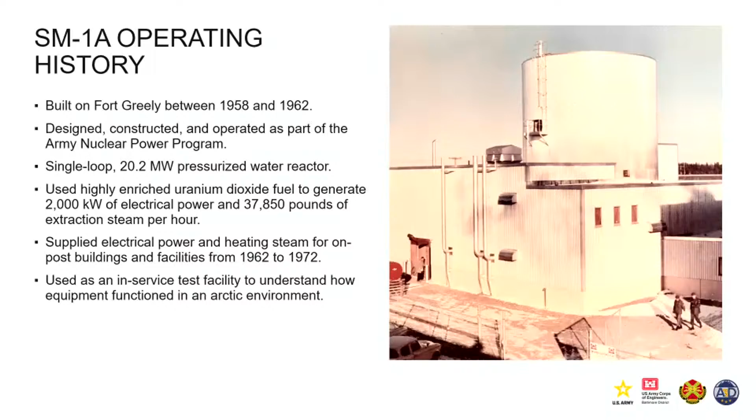So that was in operation from 62 to 72. It was primarily built as an in-service test facility to see how a reactor would operate in a remote location, and it is currently the only reactor that's ever been built in the state of Alaska.

In 1972, the reactor was shut down for the last time, and the Army went into what we call initial deactivation. We were going to place this facility into safe store. Part of that initial deactivation included removal of all the control rods, all the fuel, and all the liquid radioactive waste from the site.

After that was completed, at this particular site, the reactor components were encased to minimize dose to employees who continued to work in the central heating and power plant. So a combination of an AM9 grout and concrete cap were placed in the reactor container vessel, the spent fuel pit, as well as the hot waste tanks. So they're all encased, which again helps to further minimize any potential dose to anyone working in these areas. What are we looking at in this picture?

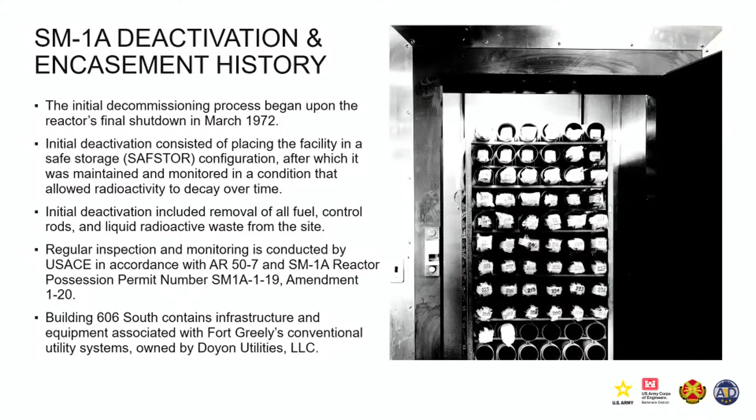As we discussed, Building 606 is the infrastructure and equipment for all of Doyon for the central heating and power plant, and so we've isolated those operations from our project.

So here are a couple quick photos. As I discussed, when we were in the planning phase, we quickly realized that there was no safe way for us to implement this project without relocating all of Doyon's infrastructure from the north end of the plant to the south end of the plant, which included not only some of their conventional utility equipment, but also their administrative offices and some of their supplies.

So we worked with the installation as well as with DLA and with Doyon, and we issued a modification to their privatized utility contract. Over a course of 18 months, Doyon moved from the north end of the plant to the south end of the plant. Now the south end of the plant is a standalone facility for Doyon, so there should be no impact or interruption to any of their services to the installation.

Our team did a final audit and inspection of that in May of 2023, and that was really what we considered to be the first phase of our decommissioning effort. So our side of the building, the north end, has been completely segregated from the south end, and we'll take additional steps to segregate those portions of the building as we move into our next phases.

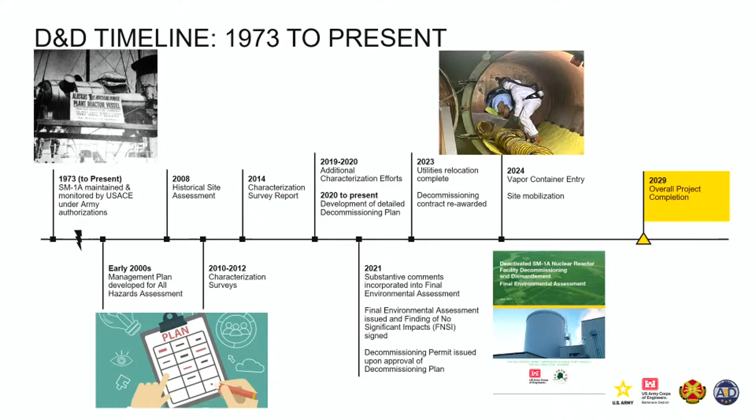And at this time, we anticipate we will be done in 2029.

Okay, so we'll move into our regulatory framework. We are self-regulated, authorized under the Defense Utilization Facilities, Section 91B of the Atomic Energy Act of 1954. So all of the wastes generated from this project are legacy Department of Energy waste. We operate under the Army Radiation Safety Program, which is AR 385-10. We have our own set of radiation protection plans and programs.

As we transition into the field later this summer, our contractor will implement their radiation protection plans for the project. All of our permits to both possess the site and implement the decommissioning are issued by the Army Nuclear and Countering Weapons of Mass Destruction Agency. We call them USANCA. So we have those permits, and that regulator does come and visit us on a very, very frequent basis.

They were here in January again. They also stand up and host the Army Reactor Council, which brings in additional subject matter experts from the Army to support any regulatory decisions that they need to make. And because we are self-regulated and we don't want to recreate the wheel, we do comply with DOT, the Department of Transportation, the Nuclear Regulatory Commission, and EPA.

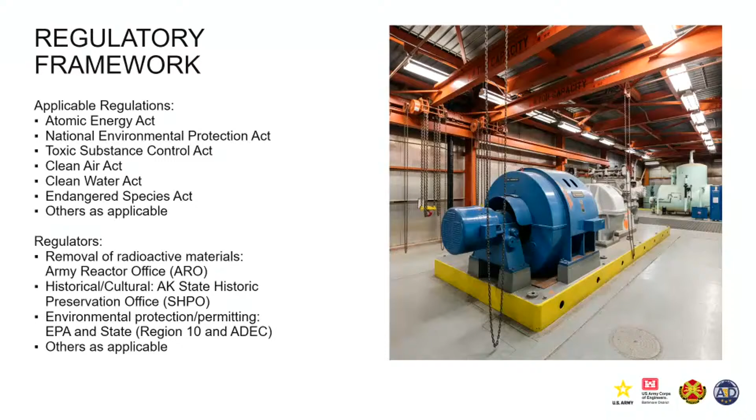We've been coordinating with EPA Region 10 with respect to our waste generation, and then Alaska Department of Environmental Conservation for any local needs that we have from a regulatory perspective.

Okay, so we'll move into our planning efforts to date. We've done extensive characterization of the site that began in 2011. The proposed action under our environmental assessment was to decommission and dismantle the SM-1A in its entirety, which will reduce and remove residual radioactivity, and will allow us to release the site for unrestricted use here at Fort Greely. The environmental assessment did find, again, no significant impacts from implementation of the project, and actually found that there will be long-term beneficial impacts because we're going to remove the radioactivity associated with the site.

As we discussed, we do have a memorandum of agreement with the State Historic Preservation Office, and our final formal decommissioning plan was completed in January of 2022. And I think the important thing to note, this is our third reactor as a team. I've had the same team on 2 other reactors to date, and we've successfully implemented the decommissioning of the MH-1A, which was a nuclear reactor on a floating barge. And we are successfully implementing right now the decommissioning of the SM-1 at Fort Belvoir in Virginia, which is the sister plant to this facility.

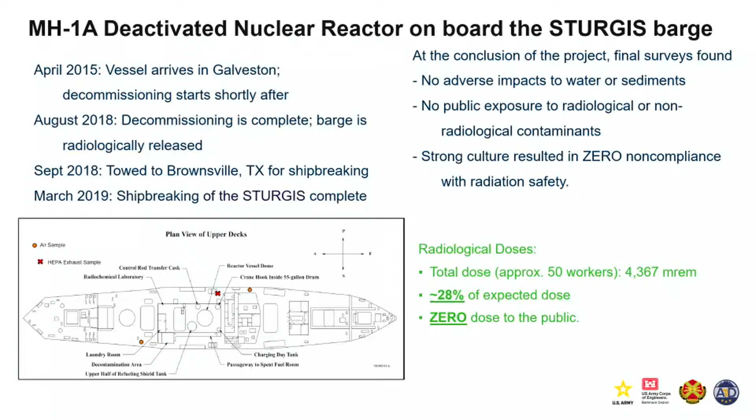The SM-1 deactivated nuclear power plant at Virginia is the sister plant to this facility. They're pretty much mirror images of each other. We have removed all the reactor components at this site. Just today, all of the above grade components at the site have been removed. So demo above grade is complete.

This particular site has extensive soil contamination, so the team's been diligently working on that, and that site's planned to be wrapped up in 2025. To date, we've worked on that project for over 3 years with no safety incidents at the site and no radiological concerns at the site.

Again, since we have removed the reactor components, the radioactive portion of this project is primarily done. Our overall expected dose to our workers was about 880 millirem, and to date, all of our crew has received only 309 millirem. So still, again, a significant reduction in what we anticipated.

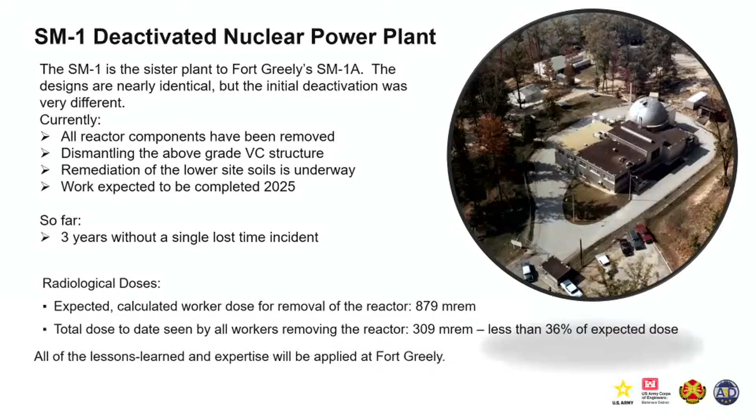What we're doing here is bringing all those lessons learned and all that expertise from both those prior projects to Fort Greely. So our approach to this project, and what the contractor has been tasked to do, is to prepare all the plans to implement the project at this point to ensure compliance with our decommissioning plan and our decommissioning permit. This includes project management, all the radiological and occupational safety, and significant engineering evaluations to go into this project.

We will remove all the reactor components and all contaminated soils. Everything will be properly packaged and transported to the lower 48 for disposal. We do a significant amount of in-process radiological surveys, as well as when we're prepared to leave the site, we will do what's called a final status survey, which is the final radiological survey to demonstrate to the regulator that we have achieved unrestricted release for the property.

All the buildings associated with the reactor will be completely demolished and removed, and the site will be restored for future use.

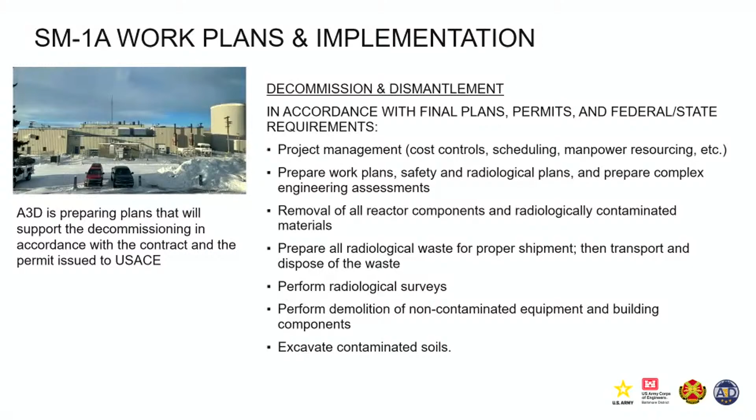One of the key components of the work, and one of the things that was important to our project team, was the ability to work year-round here in Alaska. So the contractor has come up with a very innovative way to allow us to work safely year-round and to provide a tempered environment for us to work in.

So we will be installing a very large weather enclosure. It'll be a large tent for the remainder of this year. We hope to mobilize in May and begin construction very soon thereafter.

And that tent will provide a cover over the entire north end of the site. Within that tent, we will do all of our waste packaging. We'll keep our equipment inside. We'll do all of our environmental and radiological monitoring, both interior and exterior to the tent. And that'll give us that buffer to keep our employees warm year-round to continue to work.

Additional containment will be built within the tent once we begin to actually start removing reactor components. And prior to doing that, we will definitely be coming back and hosting meetings so that you're aware of how that's going to be done and what to expect when you see things going on here at the site.

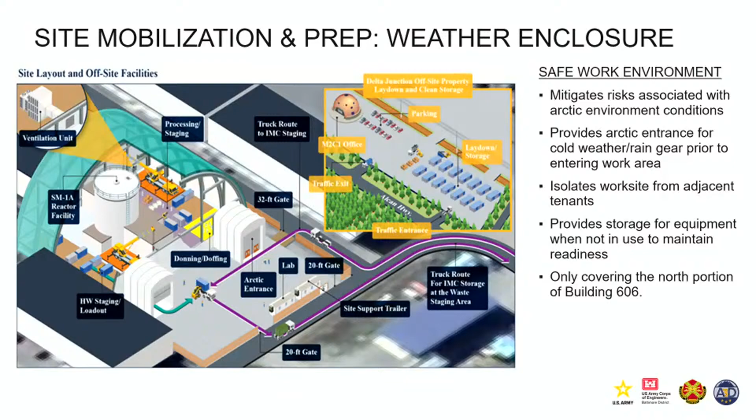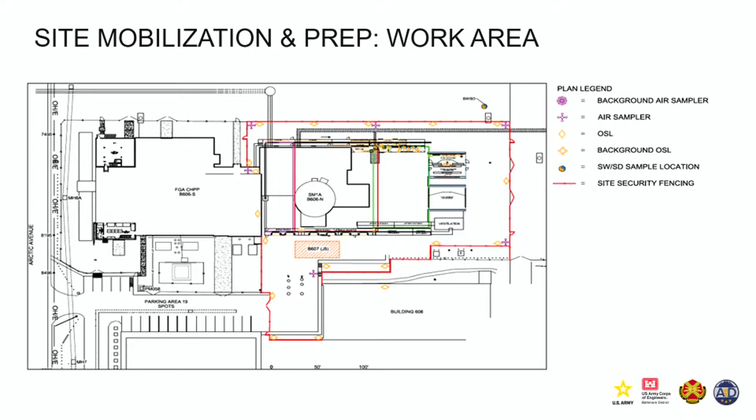There'll be manned access points into the facility for our team, and those areas will be strictly controlled from a security perspective. Other than our team, only fire and emergency services will have access to those if there were to be an incident during non-working hours.

So in addition to the primary site, since it's a very, very small site, we've worked very closely with the Department of Public Works to secure another location here on post to actually build another tent, which is where we'll store all of the waste once it's been packaged and is ready for transport. The primary reason we're doing this is we do have a very long multimodal transportation route to get this waste to the lower 48.

And so some of this will have to be moved in shipping campaigns. And since the site is very constrained, once the materials, the waste is packaged, we want to quickly move it off the site to make sure that we have maximum flexibility in our work area.

So there will be another tent built and constructed about a half a mile from the primary site. It will be fenced, secured, and monitored via camera. And then all of the waste will be stored in there, and then it will exit from that to be transported off post.

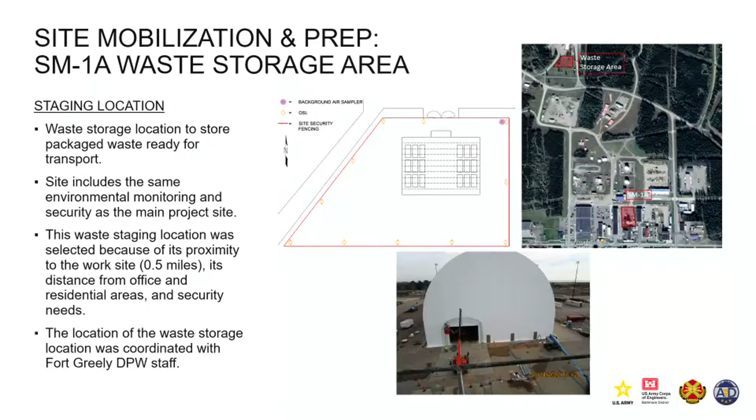And it will go out to, what is it, Big Robin Road? I think it's the next slide. Maybe? No. Okay, well, it will go out the primary main gate onto the Richardson Highway. And we'll be talking about that a little bit later on the slides.

Once the tent is constructed, we will be prepared as a team to demonstrate to our regulator that we're prepared to implement formal decommissioning, which actually starts with the asbestos abatement at this site. So because of the age of the building, we have asbestos, we have lead-based paint, we have PCBs, we have a lot of universal waste. And we did leave a few items from the utility separation that we need to deal with as well. So that will be our primary effort for the first 3 to 4 months.

And the reason we want to do all of the hazardous material abatement first is it minimizes exposure to our employees in the long run, and it minimizes impact to cutting through a wire or pulling a wall down and realizing that there's asbestos behind it. And that's one of our key lessons learned from other projects, because that has happened to us. So we will be doing that in early 2025.

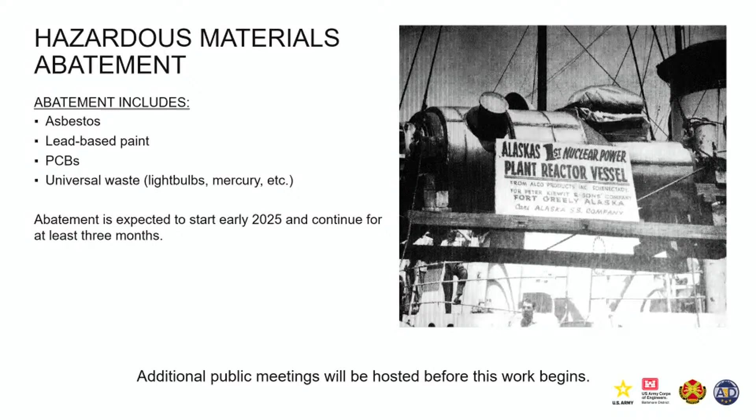And prior to that, we will host additional public meetings, again, to make sure that everyone's involved and aware of what the next steps will be.

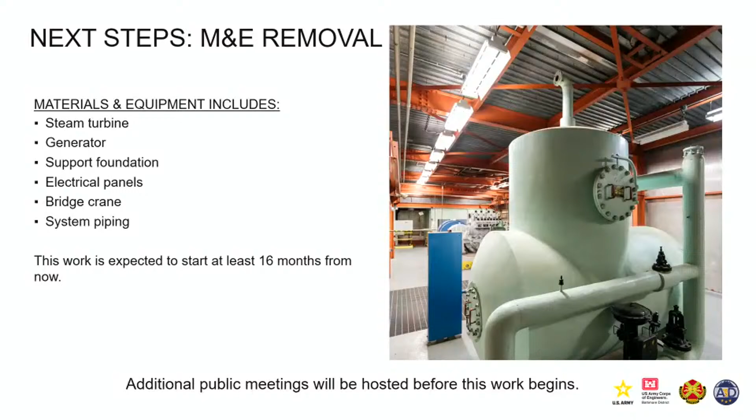So moving into waste transportation and radiological safety. Radiation safety, safety in general is the number one priority for the Corps of Engineers. So there will be minimal risk to the public, to any of the tenants, to the community on Fort Greely from this project. The reactor pressure vessel, as we said, contains no nuclear fuel.

So again, no nuclear fuel is left at this site. So really what we have left here is large chunks of activated metal that resulted from the operation of the facility. So our primary mission is to remove all that, safely package that, and get that moved to a disposal facility in the lower 48 states.

The primary reason that we went into SAFSTOR for such a long period of time was to ensure that the occupational safety of our work crews was maximized. So the primary driver from an occupational perspective is the cobalt-60 associated with the operation of the reactor. It has a very, very short half-life of 5 years and some change, and it has decayed away. So from an occupational perspective, that makes our dose during implementation significantly less and gives us greater ability to control that dose to our crew as we implement the project.

As I've stated, this team has done 2 other reactors, and this will be our 3rd. So we're bringing all of our skill sets to this project, and we are prepared to implement this project with safety at the forefront.

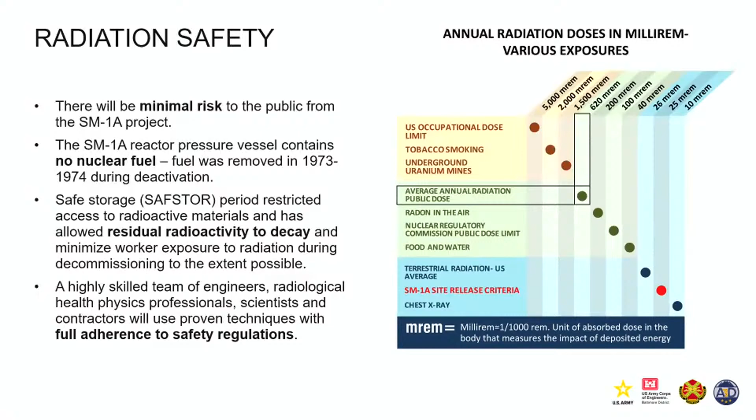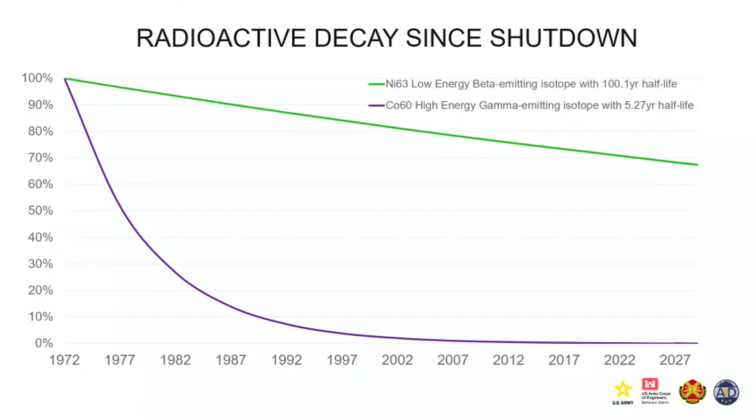The other component that is of concern for us is the nickel-63. It is primarily associated with the long-term disposal, and that's what the disposal facilities are designed and implemented to manage in perpetuity. It will not decay away. It's not going anywhere anytime soon. And so our efforts here are to remove that from the installation and remove this permanently from the site.

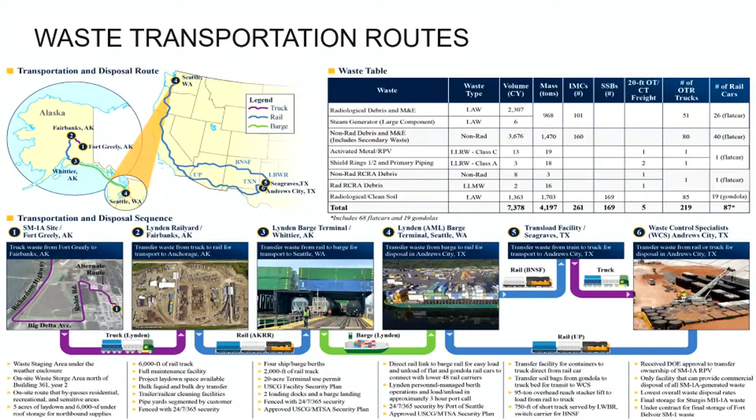We were originally anticipating using both soft-sided bags and what we call an intermodal container, which you can see in the middle photo there. At this point, we've transitioned to using strictly hard-sided or intermodal containers, just because of this long transportation route and maintaining the integrity of our packaging as we move through this round trip. We're estimating this to take about 90 days for a container to leave and come back to us. So it is a very detailed logistics plan that we're going to have to work through as we implement the project.

With that being said, all of our waste, both radiological and non-radiological, will be transported out of the state of Alaska for disposal. We have no intention of leaving anything other than maybe office waste here in the state of Alaska, and that's primarily due to the landfill regulations and the regulatory framework here in the state of Alaska.

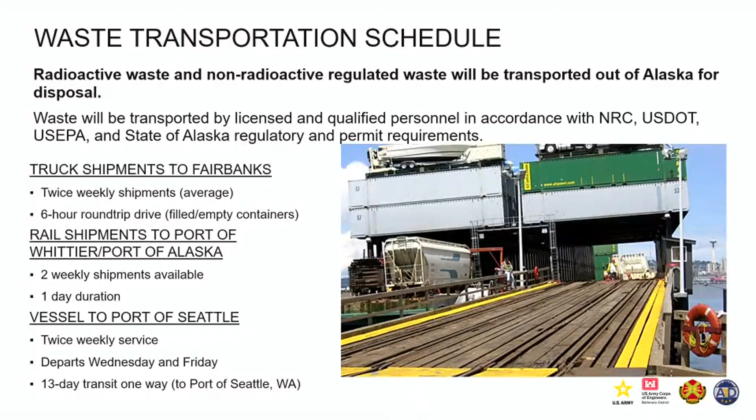We will be shipping by truck. We're anticipating 2 trucks weekly to leave here to go to Fairbanks, and then shipments out of the Port of Whittier, again right now our anticipation is 2 weekly shipments. And then as we move down into Seattle, depending on the service of the barge and when that timing is, we're hoping again to get twice weekly service. So we'll be monitoring this closely and making sure that all of our waste gets to the disposal facilities.

Another key component of the project is tribal consultation. As part of our environmental assessment, we did do an initial round of tribal consultation in June of 2020. And then in September of 2020, we actually hosted a tribal meeting where several tribes along the transportation route did come out and engaged with the project team. We started our second round of tribal engagement at this time, sent out another 103 letters just before we arrived in Alaska again this week. Now that we've defined our complete transportation route, we're beginning to receive feedback from some of the tribes along the transportation route with respect to the project.

So public involvement - as I indicated, we've got several stakeholders here for the project: our regulators, other government agencies, public interest groups, the property owner, the garrison, and obviously Doyon, the tribes as we've discussed, and then federal and state officials.

We are very committed to a very transparent communication approach with respect to this project. So we do have an active project website, and Fort Greely assists us in sharing our information here locally as well. And then I email a project update once a month to everyone on our stakeholder list, as well as post that on our project website. So if you want to sign up for that and you're not already on it, we can get you signed up.

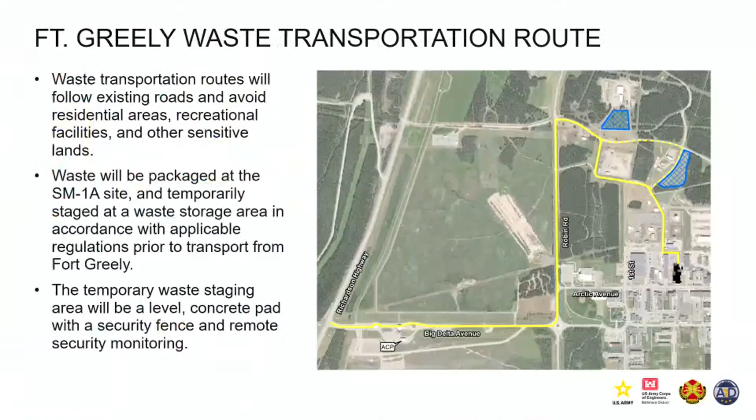Can you go to that slide? Can we do without them, or do we need to re-drill new wells? She's going to get to that. I think it was wells 11, 12, and 13. Keep going, keep going. There you go. Oh, okay.

So well 11 is interior. It was a water supply well. Well 12 and 13 did supply water at portions of the operation. Well 13 did turn into an injection well. So when the discharge to Jarvis Creek was ceased, we consolidated waste, and waste was injected into well 13. That is the reason we're going to completely remove and remediate it. It really doesn't have anything to do with the facility itself.

Fort Greely has done comprehensive groundwater monitoring, as well as our team. These wells don't impact anything from a groundwater perspective associated with the installation, and it won't have any impact on any water supply for the installation.

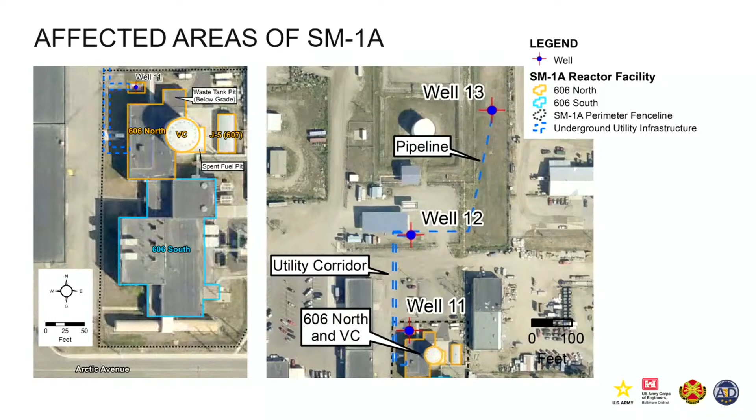I have a comment. I think that probably the biggest pushback you might see from Delta Junction would be the issue about transportation and the amount of traffic on the highway. And they're also expecting to do some improvements on the highway, is it this coming year? This summer, yeah. I think there's 18 places that are going to have passing lanes, something like that.

So you're going to have construction. You're going to have a lot more traffic there because of the gold mine, and then more trucks. I think you're going to have probably a little more reaction in the community about that.

Right, we understand, we're tracking the benefit of our current proposed schedule. We don't really anticipate starting to generate any waste until early 2025, which means that shipments from the installation really won't start until the April-May timeframe of next year.

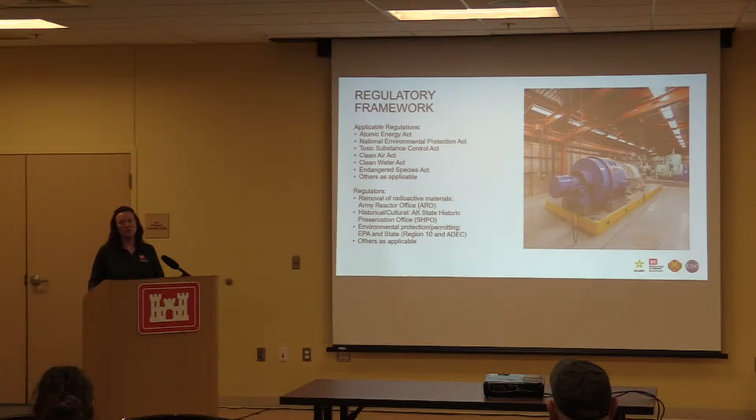So hopefully repairs are completed and we can see how things are going from a traffic perspective with the mine. We're going to do our very best to minimize our impact, but there's no other way to leave Fort Greely and get to Fairbanks. We seriously considered utilizing large cargo flights, and it's just not viable. But we did look at it, to be honest, because we knew that traffic and truck congestion along the road would be a problem. So we're going to do our very best, and it's just going to have to be something we monitor and make adjustments to as we implement the project.

All great questions. And speaking of the delegations, we did brief them on February 6th, and they are very supportive. I think they're going to be in attendance in Delta and Fairbanks as well, so we actively coordinate with them and keep them apprised of our project.

One of the things that would be positive is, like I said, there's a lot of money going into making sure this is a very safe, professional, and forward-looking project. So I think people can feel pretty good about that, because we're not nickel and diming it. We're going top drawer, we're going to make sure everything's fine. And I think that'll be very easy for people to hear and believe, because you're putting your money where your mouth is. Appreciate that feedback.